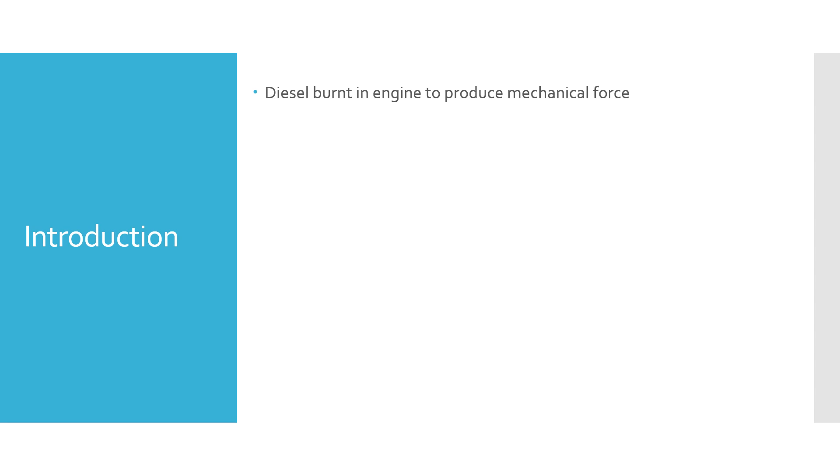In a diesel electric power station, we use a diesel engine as a prime mover. We feed diesel to this engine, and this fuel runs the engine and the shaft of the engine, which is coupled to the generator shaft, which generates electricity. Diesel fuel is burnt in the engine to produce mechanical force, meaning the rotation of the shaft. So the engine will drive the alternator, and that alternator or generator will produce the electricity.

The major concern in these plants is that the cost of diesel fuel is high, making the electricity generated by these plants expensive. We cannot afford expensive electricity generation, especially when we have options like hydroelectric power, which is a very cheap source of electricity production. So such diesel electric power stations are only used for low power generation. They are used as standby power plants to provide power to certain areas of importance in the event of a blackout, or they can be used to produce power for main power generation equipment of any big hydroelectric power plant or steam power plant.

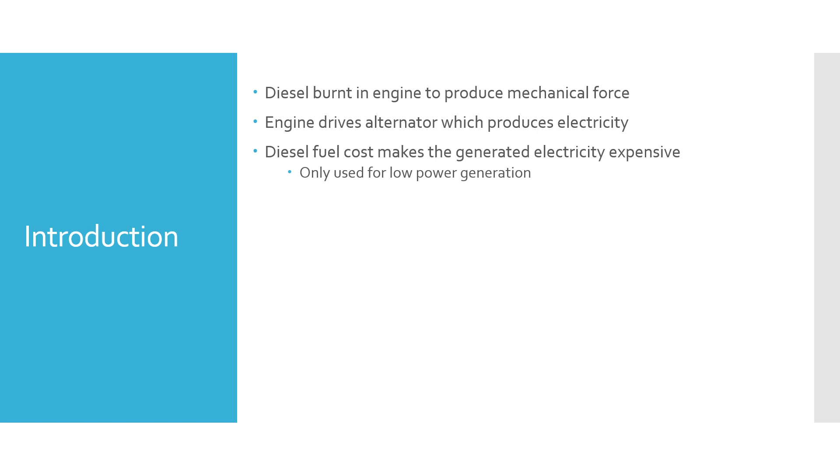The advantages of diesel power plants include their design and layout, which is quite simple. Although the layout might not be that simple, the parts are easily available, and numerous people with expertise in this field are readily available. So there is no problem in setting up a diesel electric power plant in a very short amount of time. The space requirements are very low because only a small number and size of auxiliaries are needed - equipment used to support the main objective of producing electric power.

The startup is obviously very quick for diesel electric power stations. You can just start it with a button, and it will be able to produce electricity within say 5 minutes, picking up load in a very short amount of time. There will be a slight warm up time for the diesel engine, and after that you can connect it with the grid and pick up the load.

The cooling water requirements are very less as compared to other plants, for example, less than nuclear power plants or coal-fired power plants. Operating personnel requirement is also very low because you do not need many people to operate this power plant. All control is automatic, and the plant is started by the press of a button, so it's a very simple startup. You do not need many operating personnel to operate this power plant.

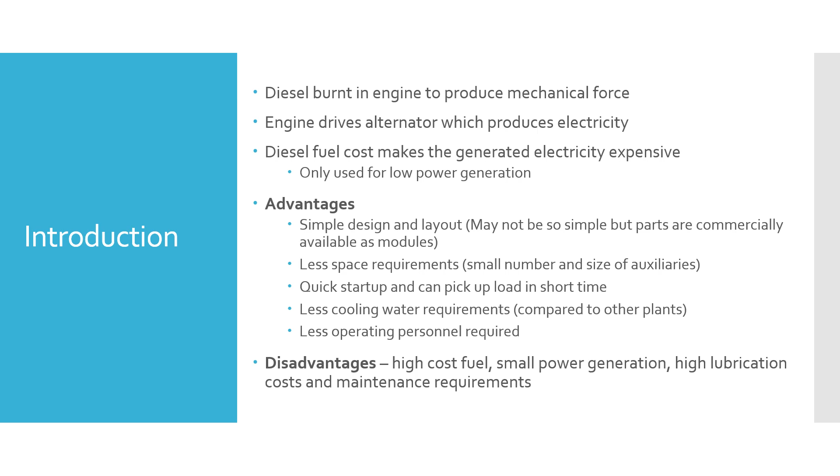Before we move on, let us delve into the working of a diesel engine. In this engine we have a couple of components, and the most pronounced of these are the pistons and a chamber in which the mixture of diesel and air is present. Then there are some intake valves and outlet valves, and a fuel injector which injects the fuel, which mixes with the air.

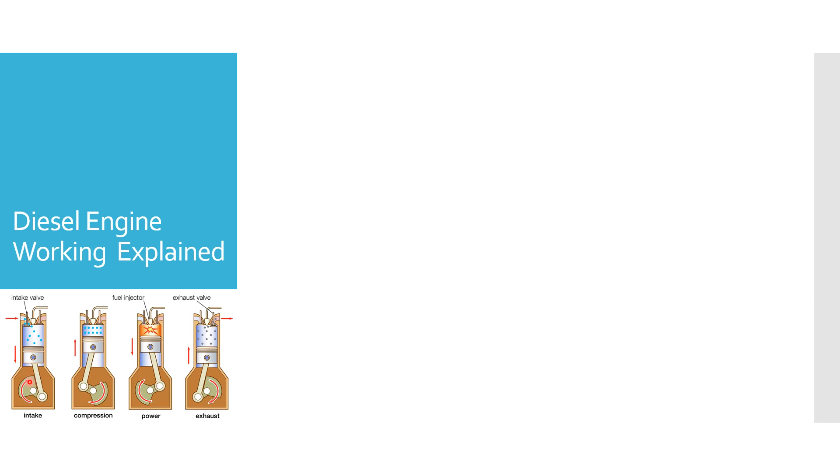Let us look at the working of this diesel engine. The first diagram is showing you the first stroke of a diesel engine - a stroke being any pronounced movement of pistons, meaning a movement which produces any significant action of the diesel engine. In the first stroke, also called the intake stroke, the piston moves downward, and air is allowed inside the cylinder via the inlet valve as the piston moves downward.

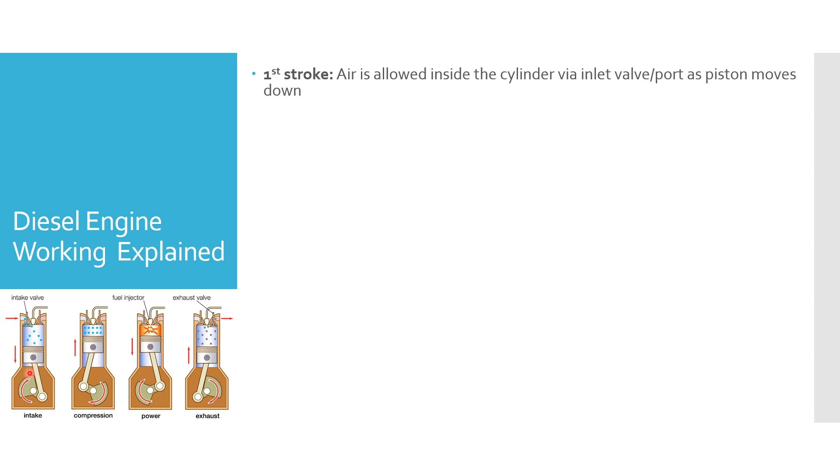In the second stroke, also called the compression stroke, due to the inertia of the rotating mass, the piston is pushed upward into the cylinder, causing the air contained in this chamber to be compressed. As the air is compressed, its pressure increases, and since this air cannot leave the cylinder because the inlet valve has closed, its temperature rises to a very high value. We need to increase this temperature above 52 degrees Celsius, which is the flash point of diesel.

By flash point of diesel, I mean that above this temperature, the diesel is able to burn even without any source of flash or ignition. So the air is compressed to ratios as high as 17:1 or 24:1, meaning the pressure of the air inside the chamber is up to 24 times higher than atmospheric pressure. This raises the temperature of the air above the flash point of the diesel.

In the third stroke, also called the power stroke, the fuel injector injects diesel as atomized droplets into this chamber, in which air is contained at a temperature higher than the flash point of the diesel. As soon as the diesel enters the chamber and mixes with the air, it ignites because the temperature of the air inside the chamber is above the flash point of diesel.

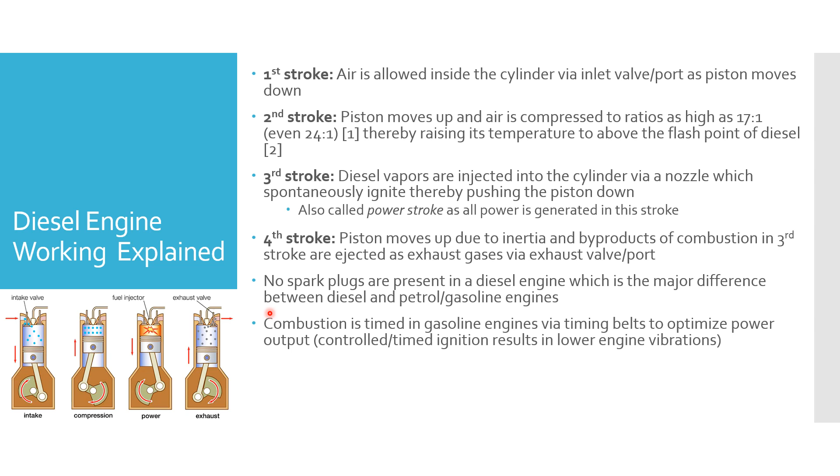In gasoline engines, the combustion is timed. There are certain timing belts or timing circuits which time the ignition of the fuel present inside the chamber, and that fuel is a mixture of air with gasoline.

That optimizes the power output of the gasoline engine, and because the combustion is timed, it is not spontaneous, so we can control and coordinate the combustion, resulting in lower engine vibrations. Therefore, diesel engines of similar capacity are heavier than the corresponding petrol engine, because in them the combustion is not timed, it is spontaneous, and we have to contain the vibrations and ensure there is enough mechanical strength in the engine to lower those vibrations and increase the service life of the engine.

So normally diesel engines are bulkier than corresponding gasoline engines. Spontaneous combustion in a diesel engine can cause vibration and added mechanical and thermal stresses, and this necessitates the construction of heavier frames compared to gasoline engines, which is why diesel engines are heavier than gasoline engines.

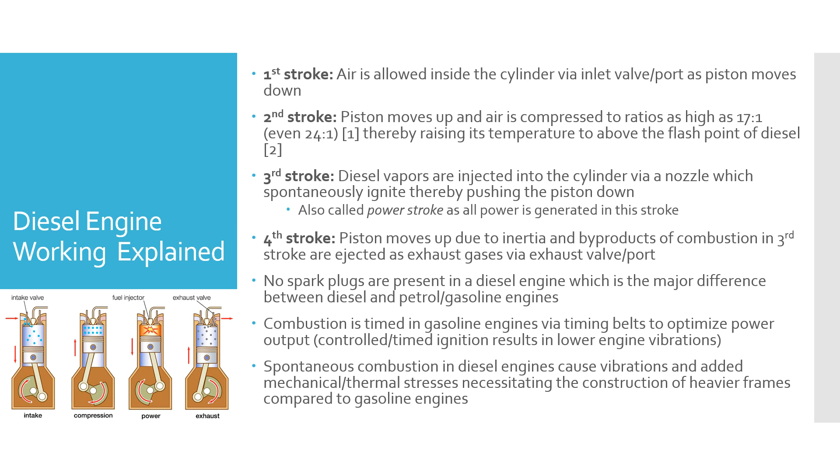Let us talk about some components of a diesel engine, this diesel electric power system. In this power system, we have a fuel supply system, which consists of a storage tank that stores the diesel on site at the plant, so that we can produce power from diesel for a month or two. This fuel is stored in the tank in order to avoid reliability issues for the plant. When you need to run the plant and you do not have diesel, you cannot run it, so we create storage and store our fuel there so we do not have to rely on outside sources to provide fuel.

Then there are strainers and filters, because the stored diesel is not exactly clean, so you have to ensure there are no suspended impurities in it.

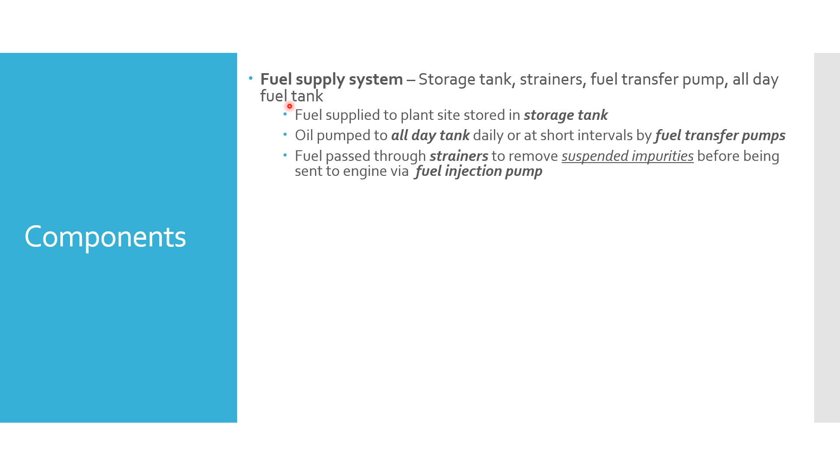So you use strainers for that purpose. Fuel transfer pump is also a part of fuel supply system, which transfers the fuel from the fuel storage tank to an all day tank, also called day tank. At the start of every new day, if you are required to run the diesel power plant, fuel from the storage tank is supplied to the day tank via strainers, and then from the day tank it is injected into the diesel engines.

Then there is an air intake system. Obviously, we need air to perform combustion, so filters are present in that air intake system which remove dust particles from the fresh air before it is injected into the engine manifold. The engine manifold is just a pipe which has one opening from where air is injected, but it has multiple openings for different chambers of the engine, so that air can enter these chambers simultaneously.

Then there is an exhaust system. Obviously, you need an exhaust system to allow the byproducts and gases to escape, and they are discharged into the atmosphere via silencer and muffler. Silencers and mufflers are equipment which reduce the noise level inside the plant, and they are also responsible for reducing vibrations in the plant floor, and they are very important in that sense.

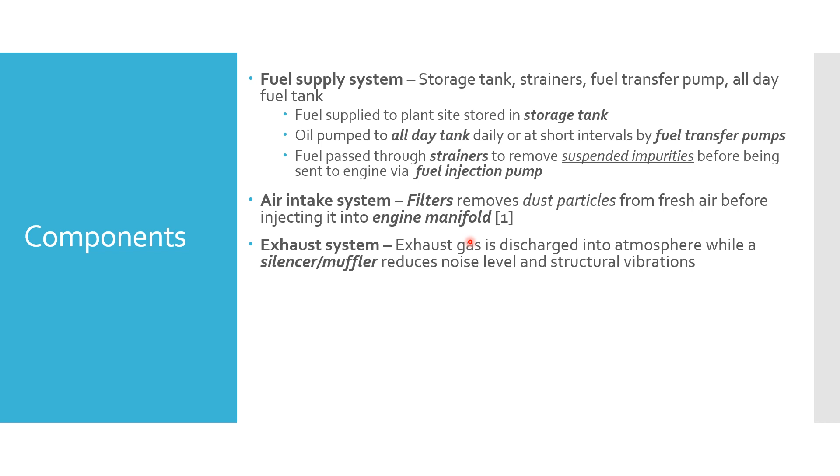Then obviously we need a cooling system, and for that we have a water source from which we draw the water, and then we pump that water into the engine jacket. That water removes excess heat from the engine walls, so that they do not get damaged at high temperature. Then the hot water is pumped into cooling towers, which are used to reduce the temperature of that water and pump it back again to the engine jacket.

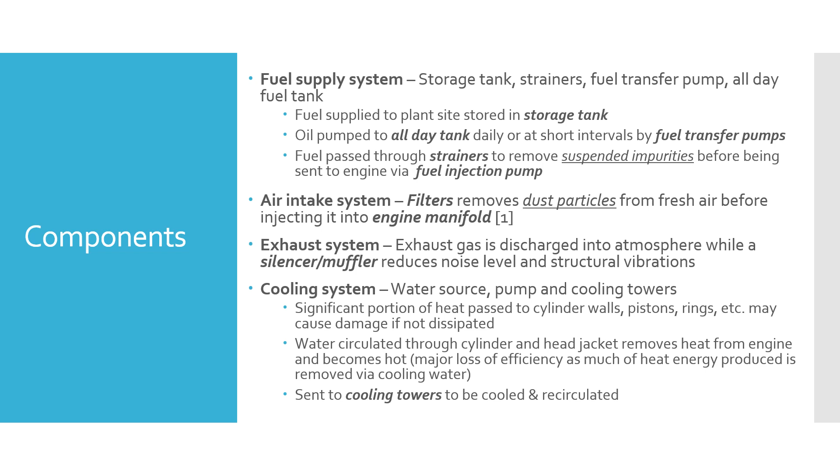After this, we have a lubricating system, which consists of a lubricating oil tank, and lubricating oil is present inside this tank. Then there is a pump - it is not written here, but there is also an auxiliary pump. In case this pump fails, the auxiliary pump continues the flow of lubricating oil through the engine, so that the engine does not get damaged. Then there is a filter and oil cooler, which cools the lubricating oil that has flown through the engine. The oil cooler cools that oil, and the filter is there to remove any impurities in the oil.

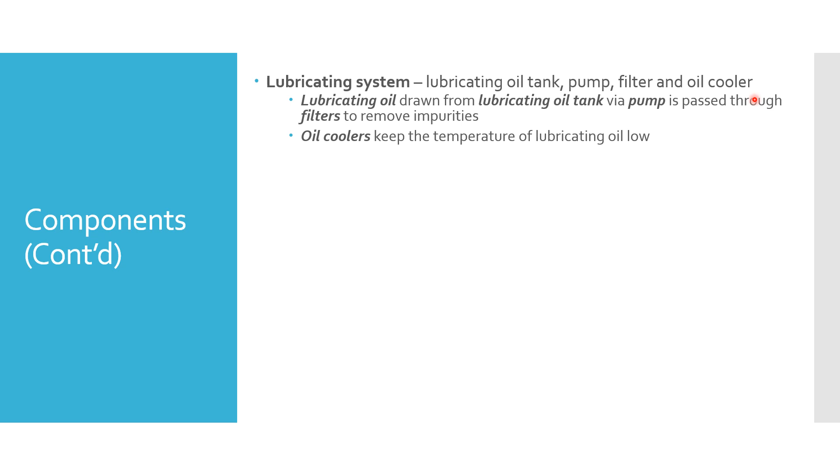We have an engine starting system, which is an arrangement to rotate the engine shaft initially before firing takes place, and the engine runs on its own power. We know that the power stroke in a diesel engine generates power for rotation of the crankshaft and therefore performing the other strokes. Here we can see that we need an initial outside source of mechanical power which can rotate the shaft of the engine so that the first two strokes can happen, and then in the third stroke power can be generated, and the diesel engine can sustain its rotations itself.

But before the third stroke happens, for the first two strokes we have to rotate the shaft of the engine, and in smaller units we can rotate it by hand using hand cranks. But in large units we have compressed air motors for starting these engines. We will discuss them shortly as well.

The principle of using compressed air motors is described here. Compressed air is admitted into a few of the cylinders - there are many cylinders in a diesel engine, so in a few of these we admit compressed air to make them run like reciprocating air motors. This compressed air enters the chamber of certain cylinders and pushes on the pistons of those cylinders. Those pistons are all coupled to each other via the crankshaft, so if you move some of the pistons of some cylinders, you are also going to rotate the crankshaft, and the other pistons are going to move as well. Fuel is admitted to the remaining cylinders for ignition, and when the ignition happens, the process sustains by itself.